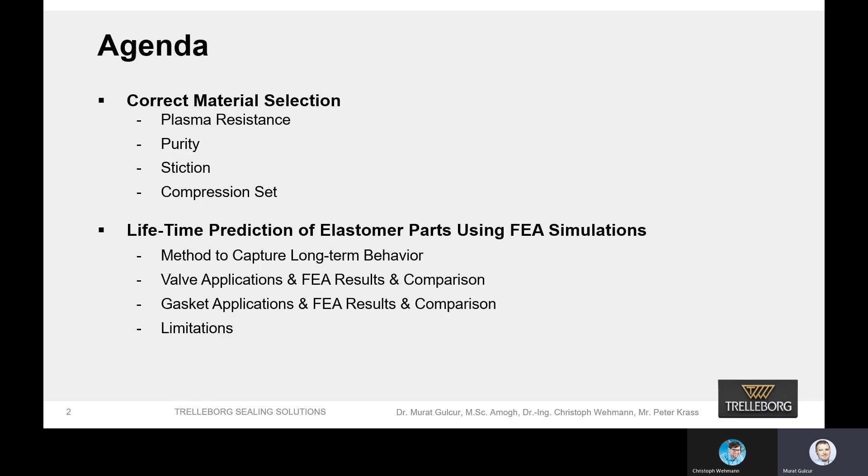Let us introduce ourselves. My name is Murat Gulcur. I am Material Development Manager for Semiconductor segment based in Trelleborg Sealing Solutions, Tewkesbury in the UK, and I will talk about the material benchmarking test today. Hello everyone, this is Christoph speaking. I'm based in Stuttgart, Germany, working for Trelleborg Sealing Solutions, and I'm responsible for simulation methods, developing new methods. I have a colleague, his name is Amogh, who did the main work here. He's an FEA engineer, also working on simulation a lot. And then another colleague, Peter Krass, who's the semiconductor segment manager of Europe. He also contributed to this presentation.

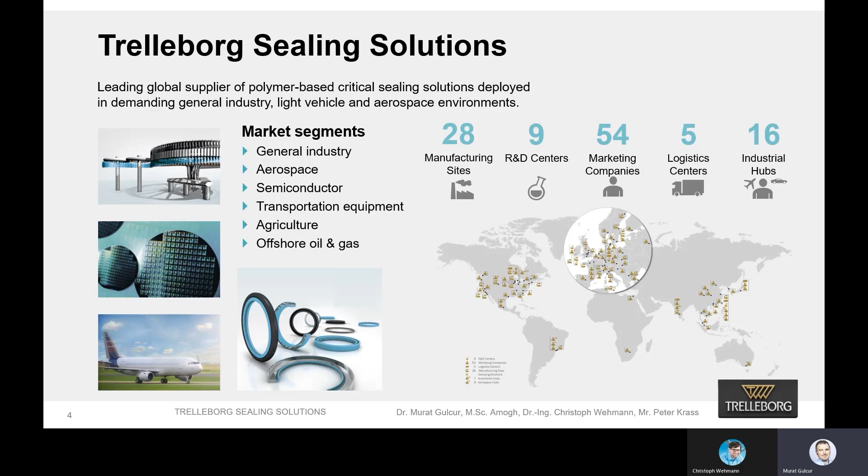I would like to start by introducing our company, Trelleborg Sealing Solutions. We are a global company, mainly a supplier of polymer-based critical sealing solutions for several industries like aerospace, semiconductor, oil and gas, and many others. We have 28 manufacturing sites all over the world, 9 R&D centers, and we are present in more than 40 countries with 54 sales offices and marketing companies, plus many other customer service hubs and logistics centers around the world.

I would like to start with sealing material selection. When we talk about seals, they can come in many shapes and materials, from molded polymers to even grease as a sealing material. But today we will talk about elastomer seals. The important thing with seals is that design is quite important, as well as the material itself. Both really drive the performance of the seal. But especially for semiconductor applications, we believe materials are slightly more important because they can also contribute to the yield quite a lot because of properties like particulation or plasma resistance that aren't needed for other applications.

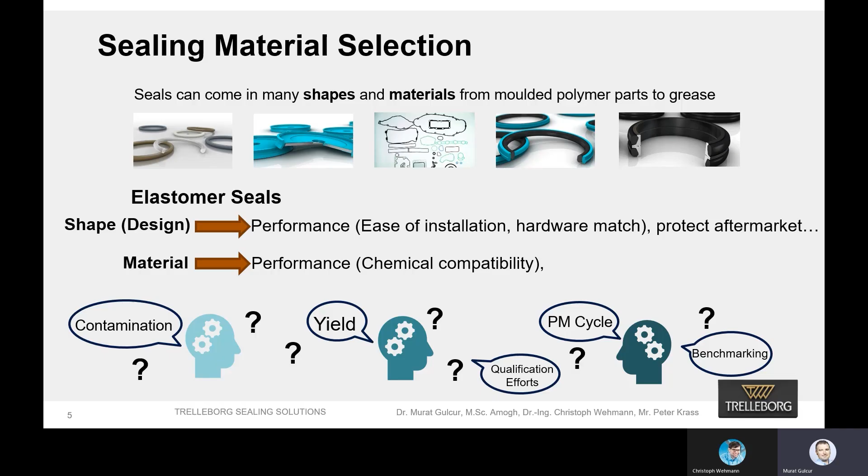It's always a little bit risky for end users, OEMs or fabs, to qualify a new material because of new material introduction. It can cause problems in the chamber, it can cause waste of time. So as a supplier, our duty is to provide as much data as we can to our customers to give them confidence to put our materials in the chambers.

So what things do we consider when specifying a new sealing material? The end user, either an OEM or semiconductor fab, expects the best performance. In an ideal case, it should just be one material that fits all processes, to remove the complexity. However, it is not always possible, because there are lots of different parameters in a process, like process type, location of the seal, process gases, chemicals, temperature range, node size, purity required, and expected lifetime from a seal.

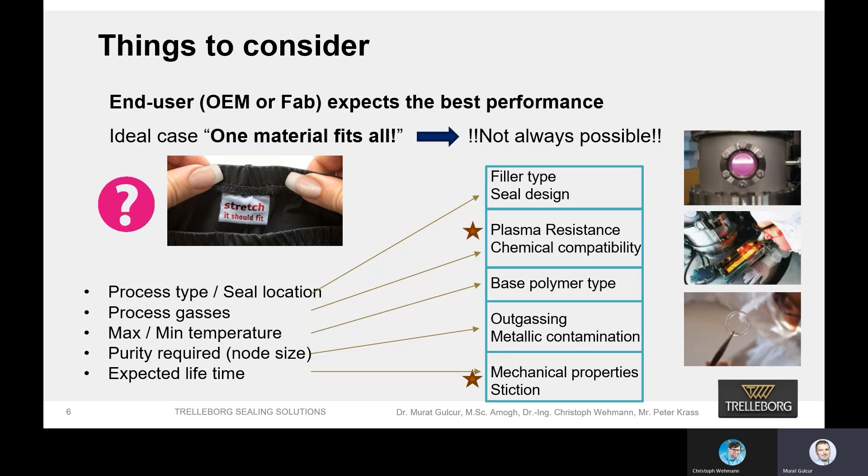Considering all these as sealing material and part suppliers, we also need to check lots of other parameters like filler type, the design - is it going to be an O-ring or custom design - what we recommend for best performance, and also from the material point of view, lots of testing about plasma resistance, chemical compatibility, as well as mechanical testing.

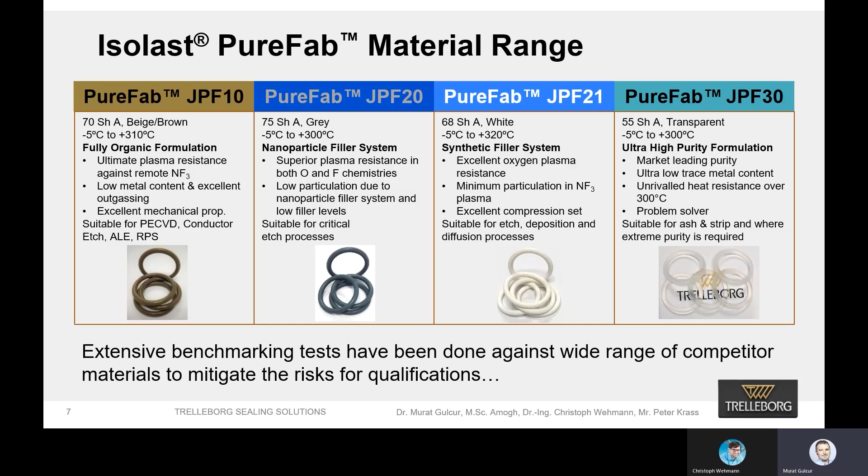Recently, we developed in Trelleborg Sealing Solutions Tewkesbury a new range of perfluoroelastomer, or FFKM, materials - 4 new materials - and we created this Isolast PureFab material range. We have done quite a lot of extensive benchmarking against a wide range of well-known competitor materials in the market in order to mitigate the risks for material qualifications for our customers. I'm going to talk about those in a minute.

Let's talk about plasma resistance - the basics. The most basic ingredient of an elastomer formulation is the base polymer. If you specifically talk about FFKM-based polymers, they are fully organic materials, therefore their etch rates, their plasma resistance, is very low, especially when we talk about ion bombardment type plasma. Traditionally, fillers are blended into these base polymers to create elastomer compounds which will have improved plasma resistance because of the plasma resistance of the fillers. The filler particles will shield the base polymer from plasma exposure up to a point, and the elastomer finally has better plasma resistance.

As an example here, a non-filled material means there's only the base polymer and the curative - the most basic rubber compound or elastomer material we can get. If you have such a material, and this seal is in the groove, in some applications these seals are exposed to plasma. From the process side, if the plasma strikes the material, over time the non-filled material will be etched away like any other organic material.

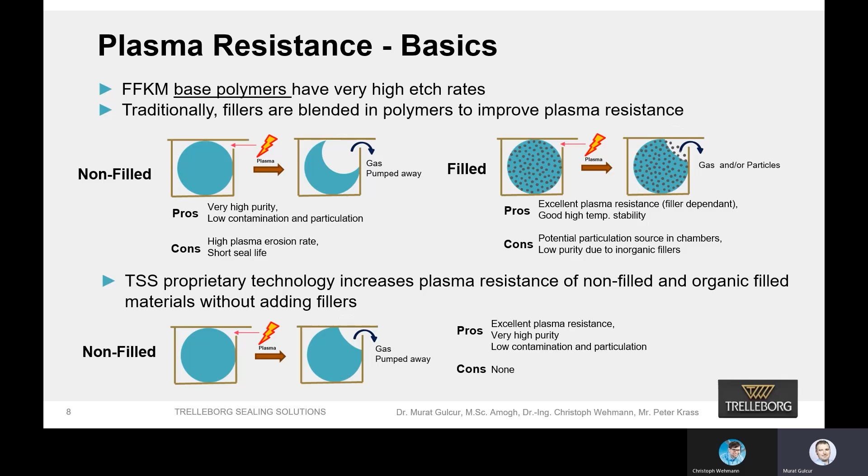So at Trelleborg Sealing Solutions, we developed a new technology. By using that technology, we can improve the plasma resistance of a non-filled material significantly, without adding any fillers. So we have all the advantages of non-filled materials, like high purity and low contamination, and we eliminate the concerns about high plasma erosion rate and short seal life, which I'm going to show in the next slide.

So most of the seal suppliers show this kind of bar chart—benchmarking tests in different kinds of plasma sources and different chemistries. And when I show these kinds of slides, I always say that not all plasmas are the same.

So I'll just take two examples. Both are NF3 plasma, which is commonly used, but on the left-hand side is direct plasma, which is more ion-rich, and on the right-hand side is NF3 remote plasma, which is radical-rich. Let's see the results a little bit more in detail.

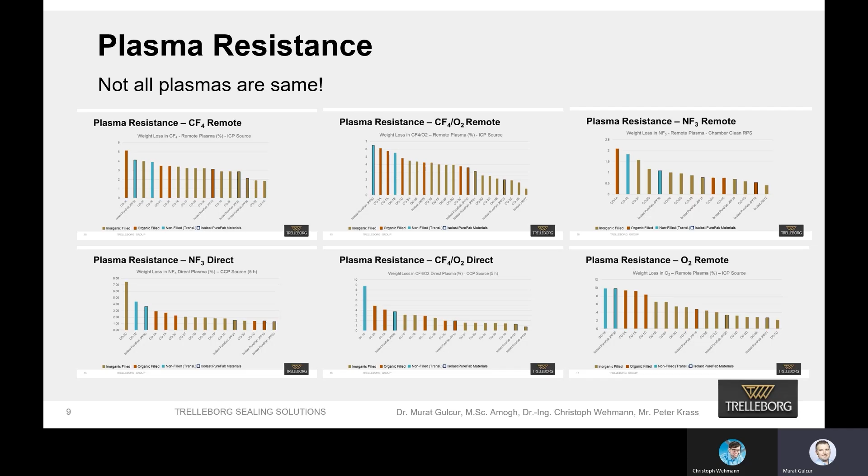So let's focus on this competitor material—the name isn't important—and let's compare it to the turquoise bars on the left-hand side. In direct NF3 plasma, that material performs significantly worse than those transparent non-filled materials, our JPF30 material and the competitor material.

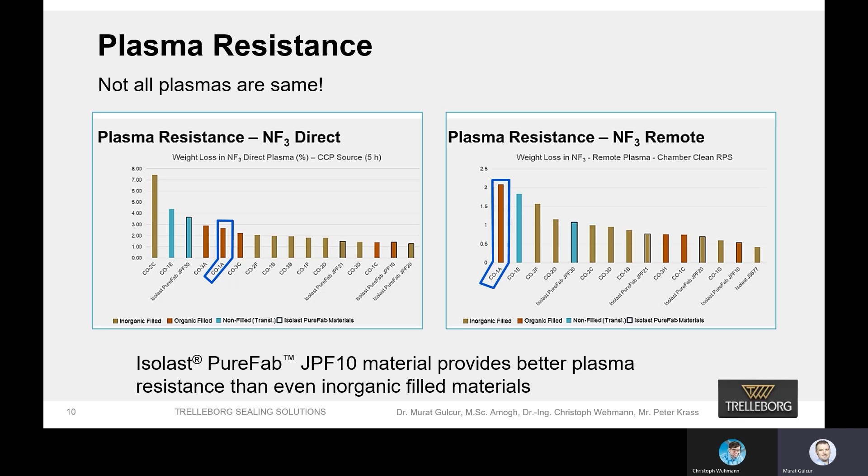But when we look at NF3 remote plasma, which is commonly used for chamber cleaning, that material performs a lot worse than those translucent, transparent materials—again, the turquoise bars. So this is only one example. If we take other chemistry examples into account, there are lots of similar examples showing that not all plasmas are the same. Materials can behave differently in different plasma chemistries and sources.

Another important property that some elastomer manufacturers don't really focus on is stiction. We believe stiction is quite important because it can cause problems with maintenance time—it can shorten the service period, and the time of service can last significantly longer, meaning higher amounts of machine downtime.

If it's a dynamic sealing application, it performs really poorly, and in some cases, leaving residue on the surface can cause higher contamination and particulation. So we use this stiction test method, which I'm going to talk about very briefly.

We have either stainless steel, anodized aluminum, or quartz surfaces that we do the test on. We take two of those surfaces and squeeze the O-ring by 25% between those jigs, then put it in the oven at 200 degrees for 24 hours. After resting for 2 hours, we connect it to our tensile machine and measure the maximum force needed to separate those plates from each other.

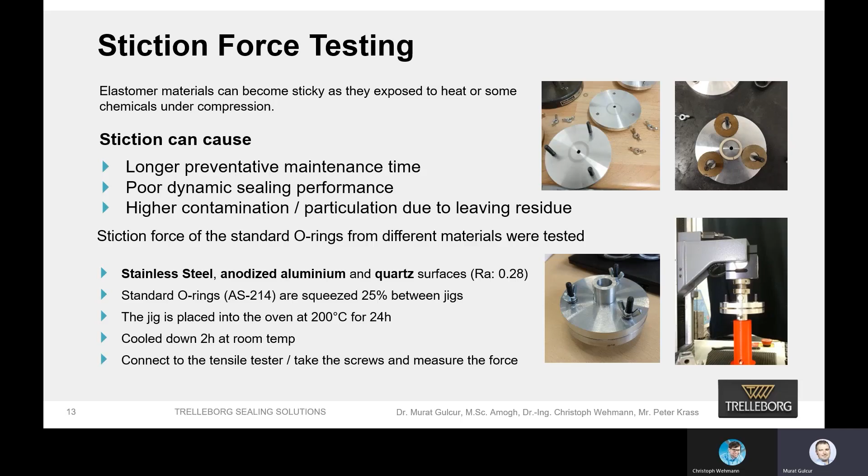So I would say the outcome of these stiction tests is similar to plasma testing, because every material—as you can see, this is some of the data we have—behaves differently.

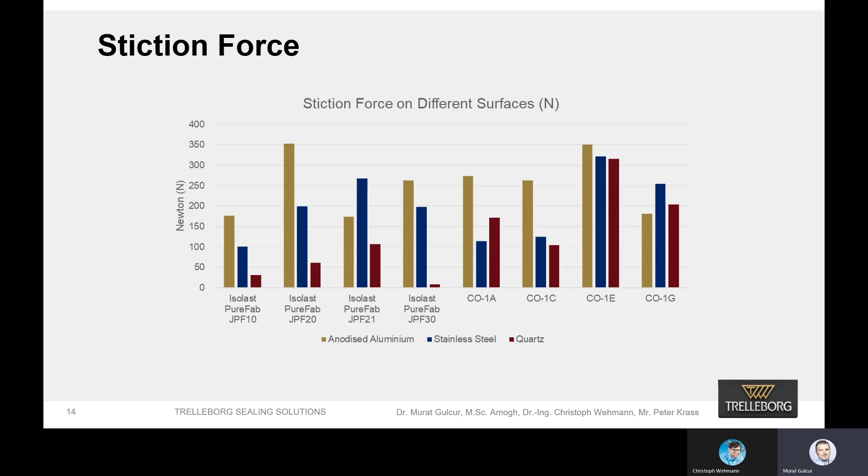Some materials perform having very low stiction force on one surface. For example, JPF30 on quartz surface, the stiction force is extremely low. We tried this 4 or 5 times, and it's always coming out like this. So this material doesn't have affinity to quartz, while it is quite sticky when we do the test on anodized aluminium. Similar to some competitor materials, which just all have sticky behavior on every surface. So this also needs to be closely examined when sealing material is specified for an application.

Finally, I'll talk about the elastomer high temperature performance. Obviously, elastomers remember their shape. When they are compressed, they go back to their original shape, and it is a quite good parameter that we need to consider to judge the high temperature performance of an elastomer material.

In order to do that, the simplest method is the compression set test, which is a standard test. While doing this test, we take the material, compress it by 25 or 18%, and then put it in an oven at a certain temperature for a certain period of time. Then when we take it out, we measure the recovery rate, and then calculate the ratio of deformation in percentage after the test. And then we end up with a graph like this.

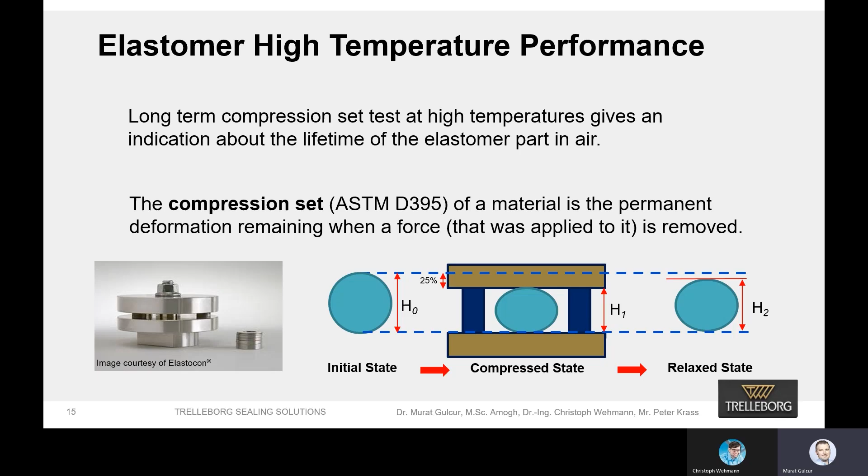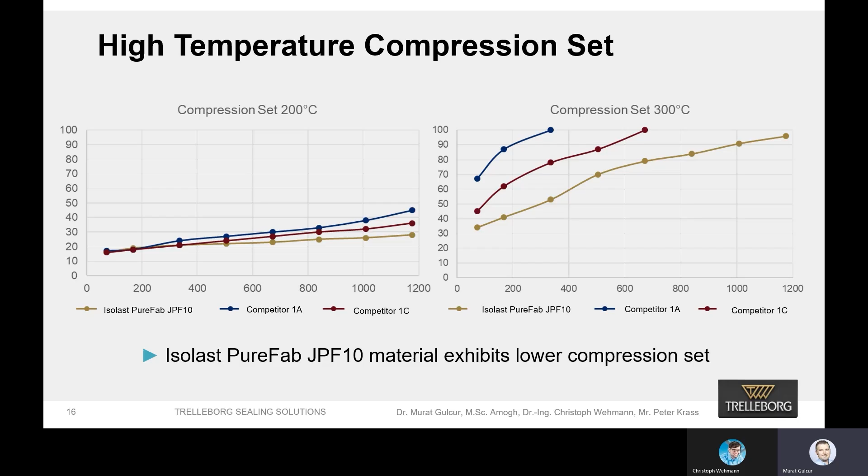On this compression set chart, you can see 3 materials are tested. One of them is our JPF10 material against 2 different competitor materials, and we did this test for quite extensive time, more than 1100 hours at 200 degrees on the left hand side and 300 degrees on the right hand side. We found out that the technology we developed has significantly better compression set, a lot lower compression set than the competitor materials, even at high temperatures.

So I'd like to just summarize what I said. There are many parameters to consider when specifying sealing materials. Obviously, the benchmarking test gives an idea about how the material performs. However, there must be a reference in order to do that. But we can also do some more comprehensive analysis, and we developed some simulation methods, and they must be applied to predict the lifetime of a seal in real life applications, which my colleague Dr. Wehmann will talk about in the next section.

Thanks, Murat. This is Christoph now speaking, and I would like to continue the presentation speaking about the part which considers simulation of lifetime.

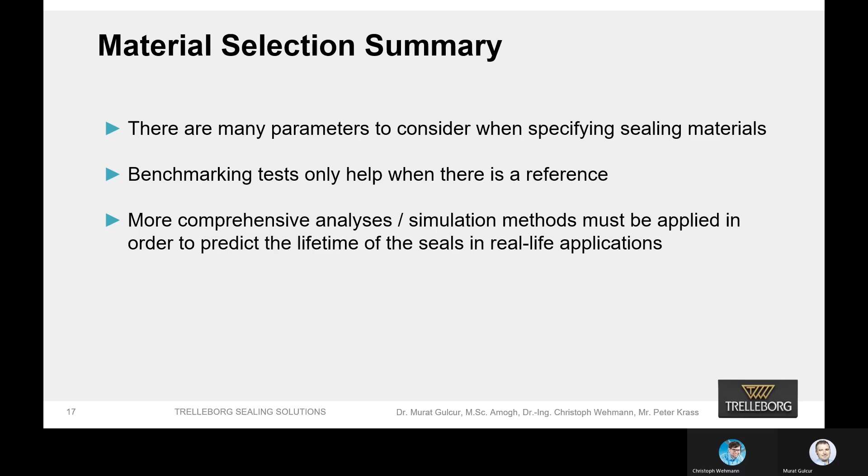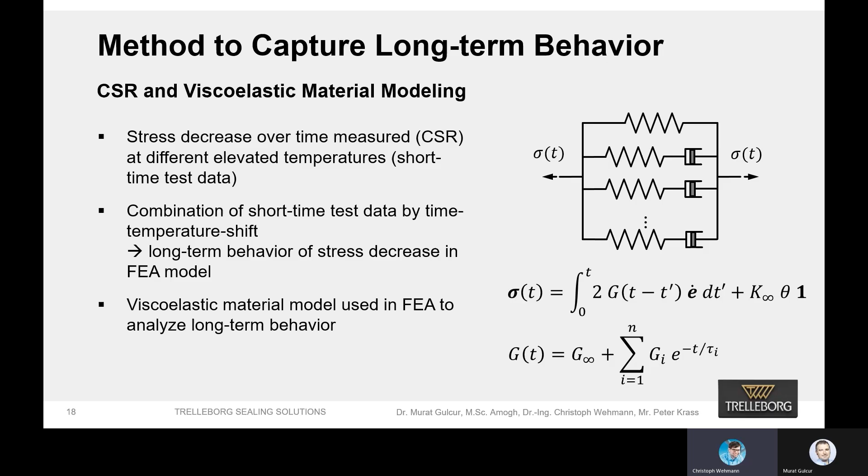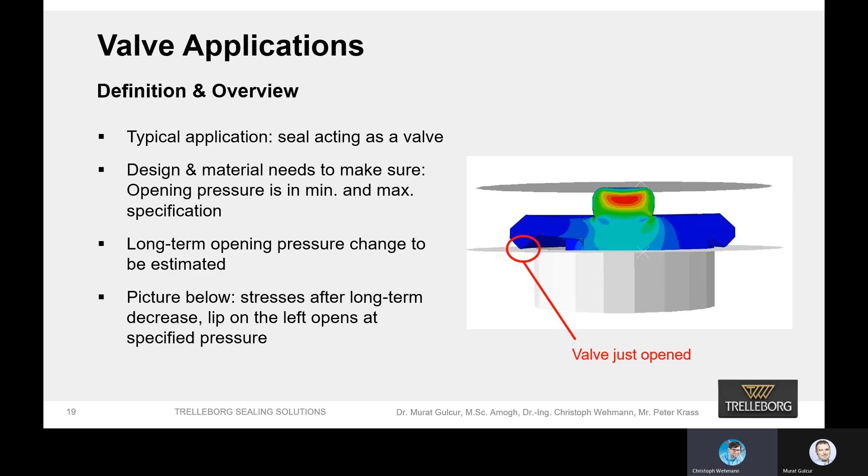So we do CSR tests and feed them into our FEA material model, as shown on the slide before. But of course, we cannot do CSR tests for 20 years, so we do them at different temperature levels, and then use time temperature shifts to simulate or capture the behavior long term. So we have to do tests at elevated temperatures, and then we can use the shift model to create such a material model which is valid for a long term, for a long time period, approximately 20 years.

And to verify our method, we did some tests on this component. Of course, we cannot test for 20 years, but we tested approximately 1 year, so really a long test here of such a valve seal. And you see, we were able to quite nearly fit or predict the experimental values here. And to make sure it's...

describing the long time period of 20 years, we did this test at an elevated temperature too. So it's not the application temperature, it's elevated so that we in the end consider nearly 20 years when we break it down with Arrhenius to room temperature. And you see, we can simulate this here quite accurately. So we are sure that we can predict the lifetime, in this case, the opening pressure of our seal or valve in an accurate way.

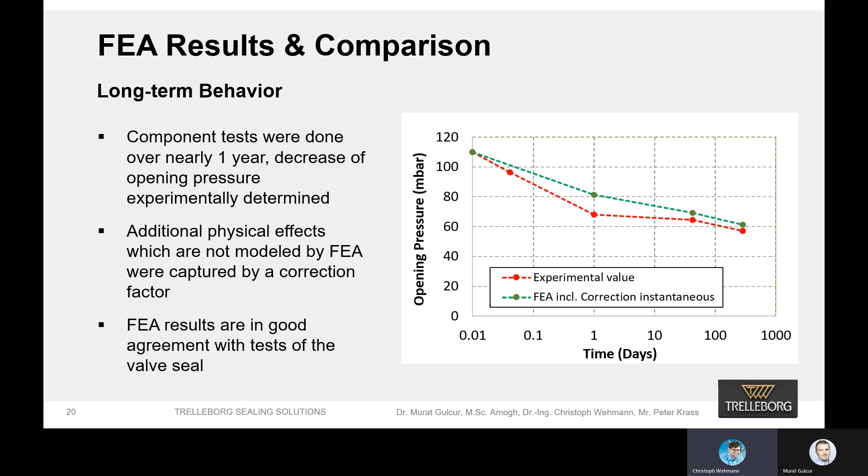We can do this at different temperatures too. And again, we use different elevated temperatures to have a material data input which can be transferred to a long time period.

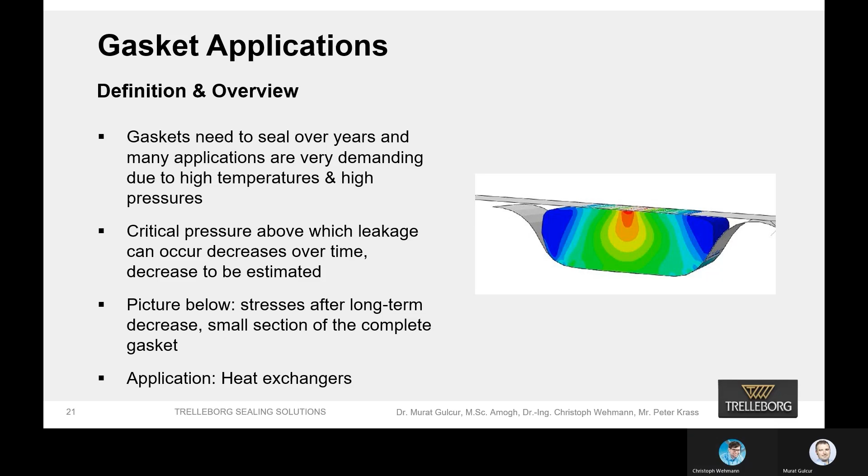In this case, also we looked at the leakage pressure or opening pressure which the seal can withstand. And yeah, we think the differences we have here are reasoned by some simplifications. The metal hardware is only modeled rigid, and we don't have the 3D effects. Maybe in some areas of the gasket we had some different tolerance situations or similar things which influenced the results, so that we had a certain difference here between test and simulation.

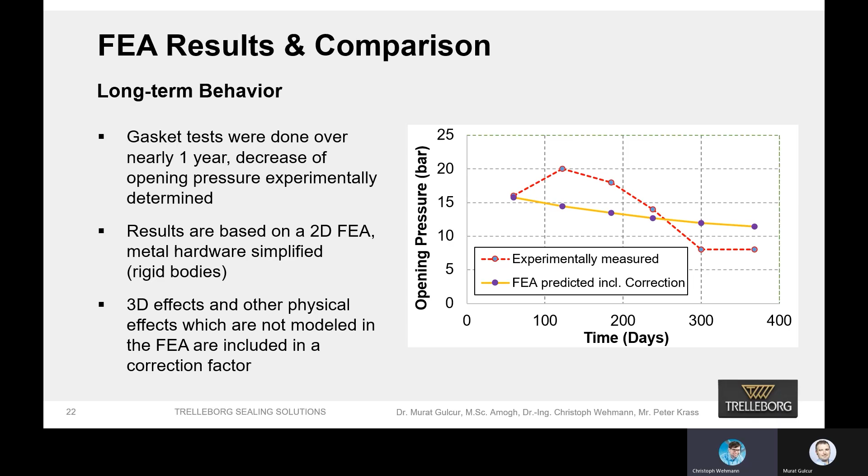But in the end, we are satisfied with that. So we have a tool with that, a method at hand, which allows us to give at least a rough estimation, and in some cases really quite a precise prediction of lifetime. And of course, this is very valuable for us and our customers when we look at the applications.

Then one other thing is shift of relaxation data. It's not possible for large temperature intervals, because different processes are occurring. And this is also connected to the fact that we have aging effects which are not of the same physical mechanism as relaxation. So there also improvements are possible when we look at our model. So these are things we are working on, meaning we will soon probably get an improvement of our lifetime prediction method.

So yeah, that's also our outlook. Then, of course, we always need to make sure that we also look at other things like chemical compatibility, temperature profiles, and other application relevant topics to make sure the lifetime prediction also captures these things which are not all in the FEA. That means in the end, an application engineer also needs to consider the situation and think of influencing factors so that we can be sure our sealing system will withstand the years requested of it.